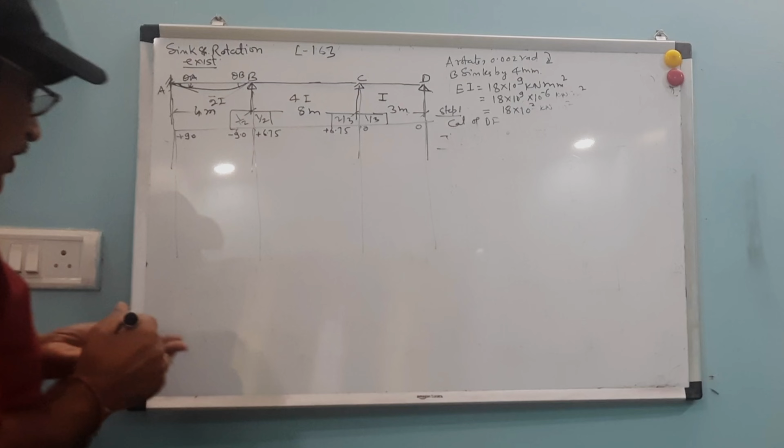This is 1/2, 1/2, and this is your 2/3, 1/3, this is your 2/3 or 1/3, let us see, this is your 2/3 and 1/3, this is your 2/3 and this is 1/3.

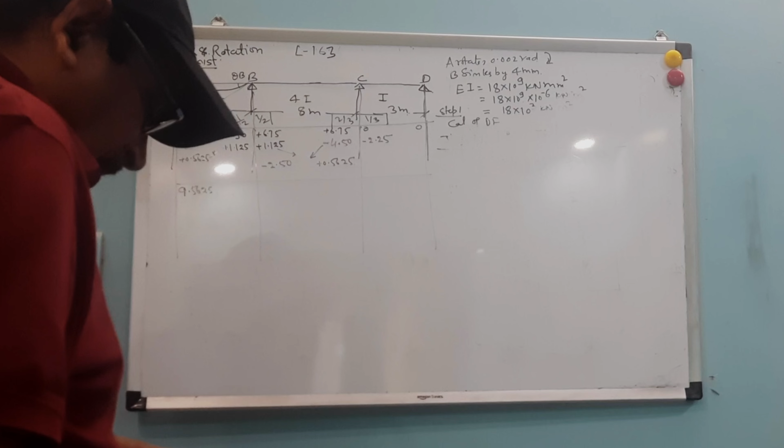7.875 comes here, and this will come, this will come 6.75 plus 1.125 minus 2.5, 5.375.

5.375 comes here, and how much finally comes here, this is your 6.75 minus 4.5 plus 0.5625, this is 2.8125, this is your positive and this is minus 2.25 and this is your 0. These values have come.

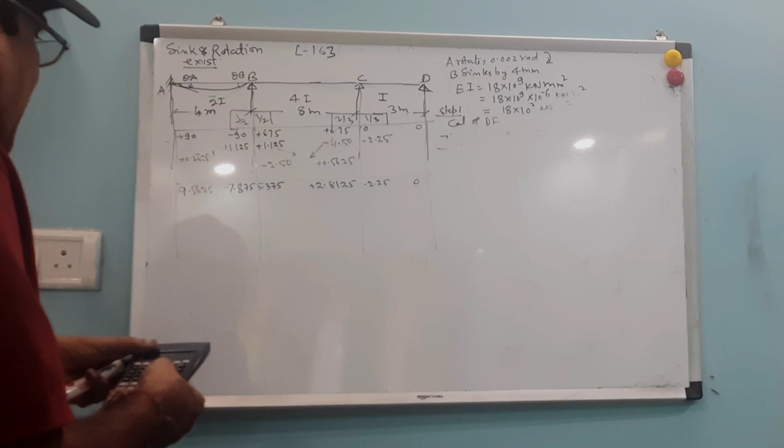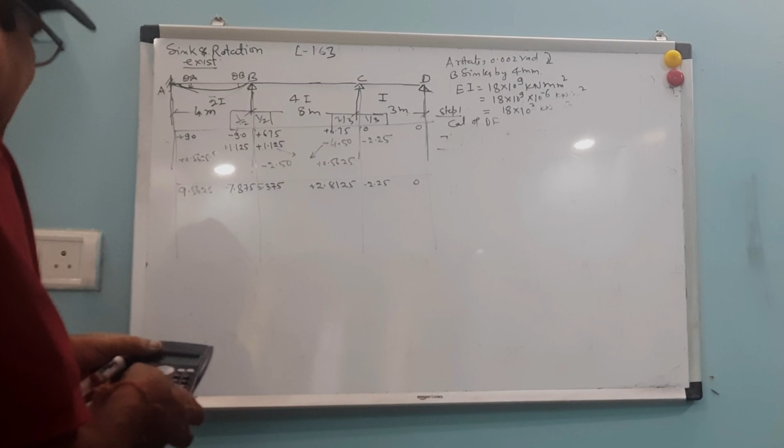7.875 plus 5.375, this is 7.875 minus 5.375, this is coming 2.5, 2.5 is coming in minus so we will make it plus.

1.25, so this will be plus 1.25, and how much will be this, let's see here, here your answer will come.

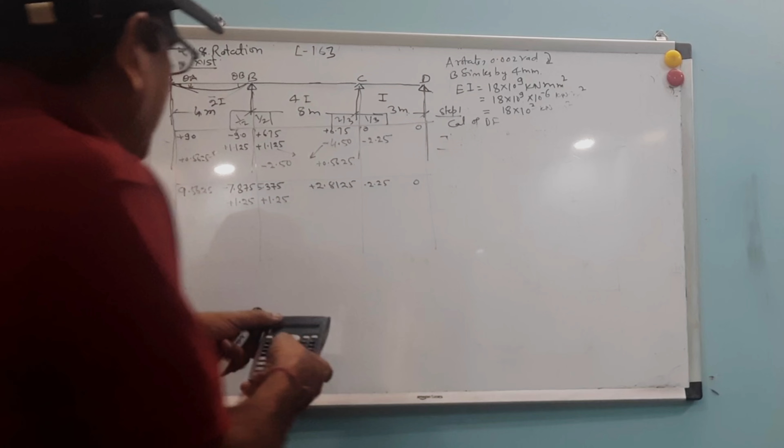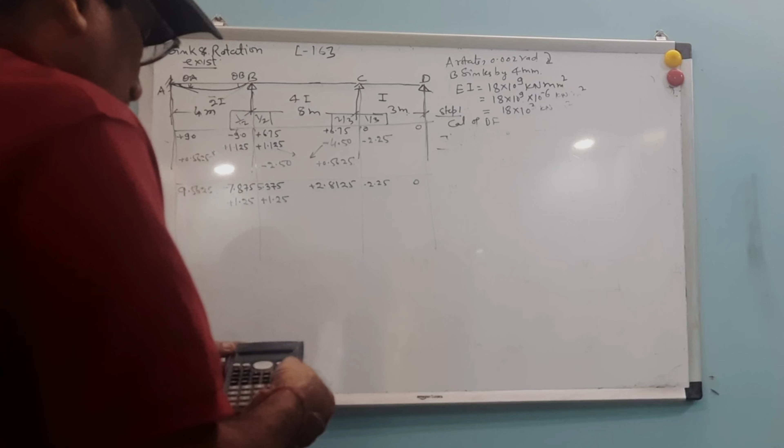2.8125 minus 2.25, this is coming 0.5625, since it is coming in plus it will become minus, divided by 3 multiply by 2, this is 0.375.

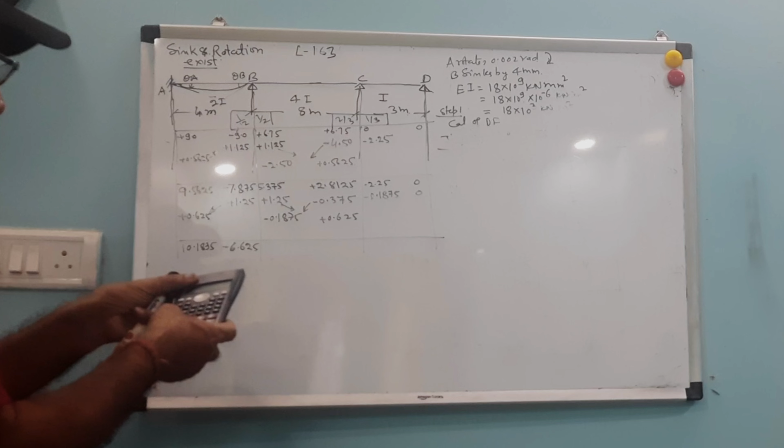How much this coming? Sorry, 2.8125 minus 0.375 plus 0.625, 3, this is coming.

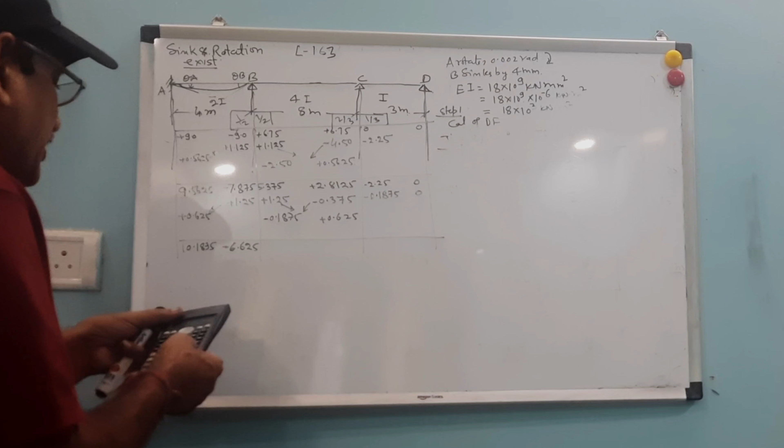How is it coming, 5.375 plus 1.25 minus 0.1875, this is coming 6.4, let's check this once again.

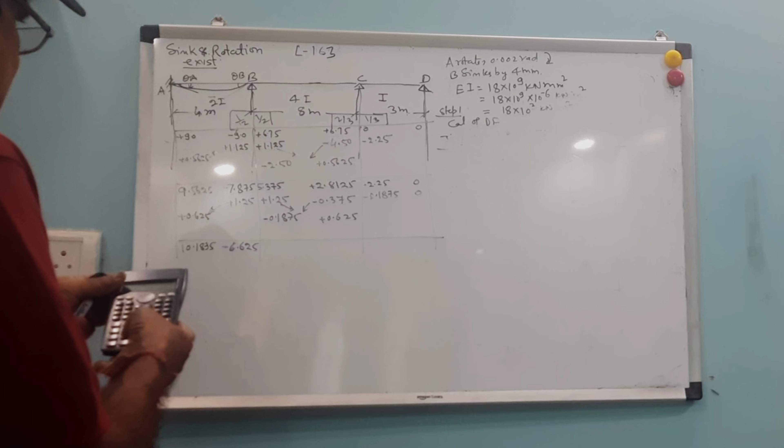5.375 plus 1.25 minus 0.1875, this is going 6.43, 6.4325, right now a difference is coming, and let's see how much comes here.

This is coming 2.8125 plus 0.625 minus 0.375, 3.0625, and how much this coming?

This coming, how much this, let's see, 2.25 plus 0.1875, this is 2.43, this is 2.4375 and 0. Then here there is an imbalance so we will try to balance it again.

So this has become 6.625 minus 6.4325, how much coming? 0.1925 divided by 2, this is coming 0.096.

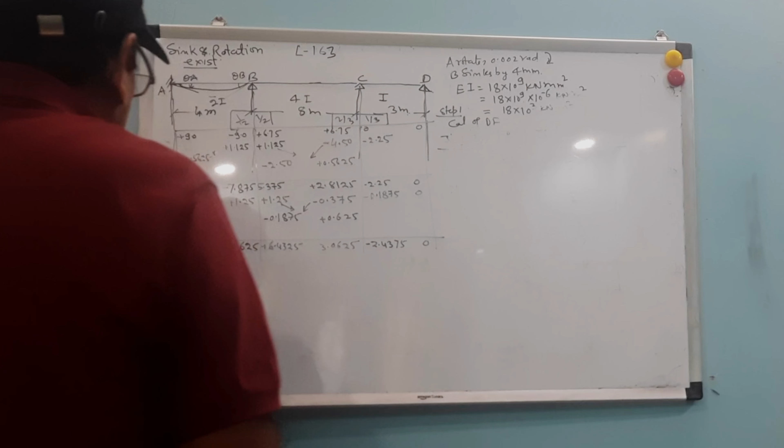0.096, this is coming plus 0.096, and this is coming plus 0.096, right? 0.096, this is in positive.

42 divided by 2, 0.21. Let us see how will this happen.

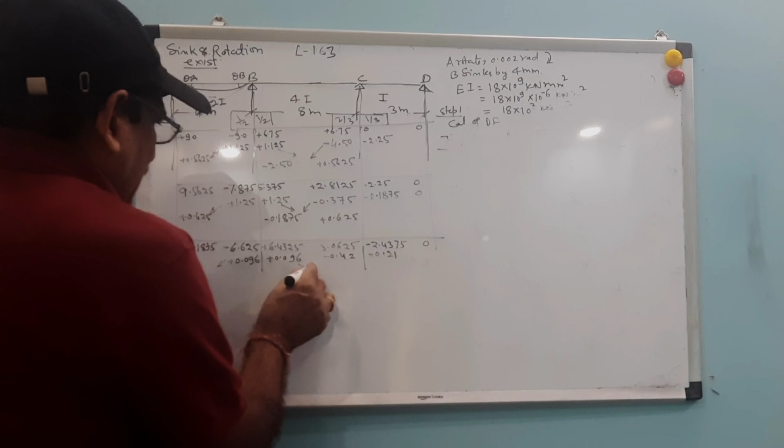So this will come, you transfer this, so we do this, 0.096 divided by 2, 0.048, this has come, 0.048, and how much is this coming? This will also become 0.048 here.

048, and now this is minus 0.21, okay, let's draw one line, here draw a line.

Let us find out this thing. How much this is coming? 0.048 plus 10.1875. This is 10.2355.

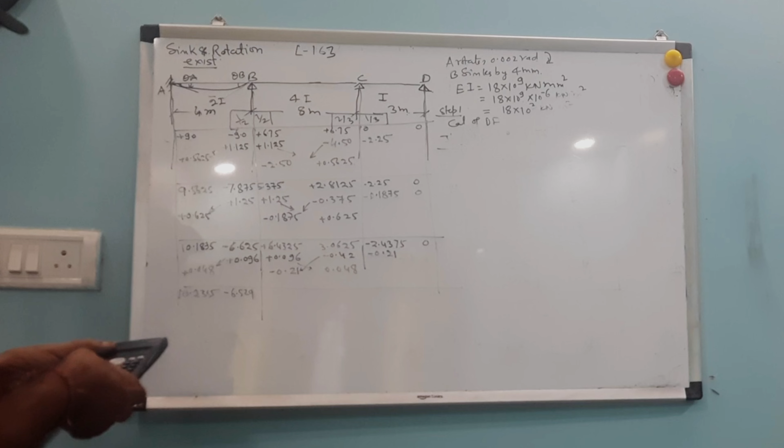10.2355. This is 10.2355. And how much is this coming? 6.625 minus 0.096, 6.529. And how much is this coming? This is 6.4325 plus 0.096 minus 0.21. This is coming 6.3185.

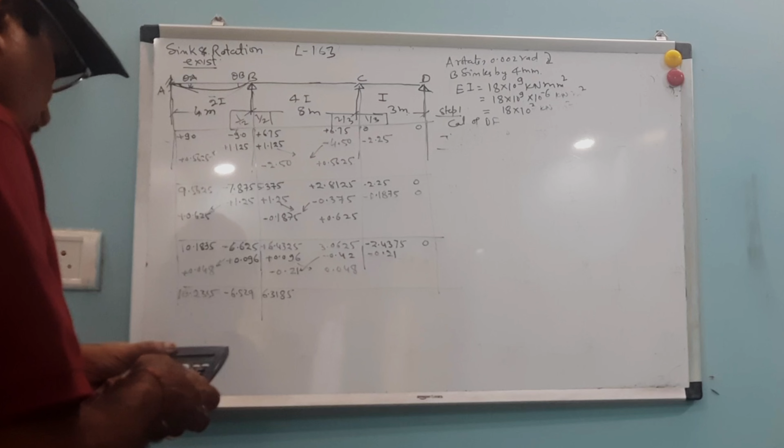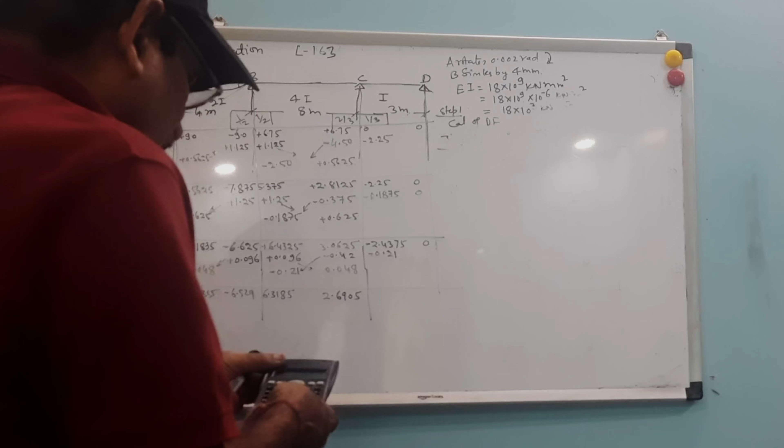6.3185. And how much is this coming? 3.0625 plus 0.048 minus 0.42. 2.6905. How much is this coming? 2.4375 plus 0.21. 2.6475.

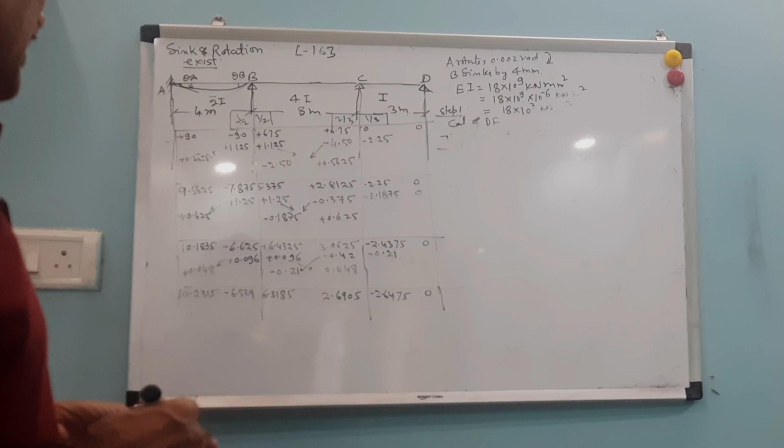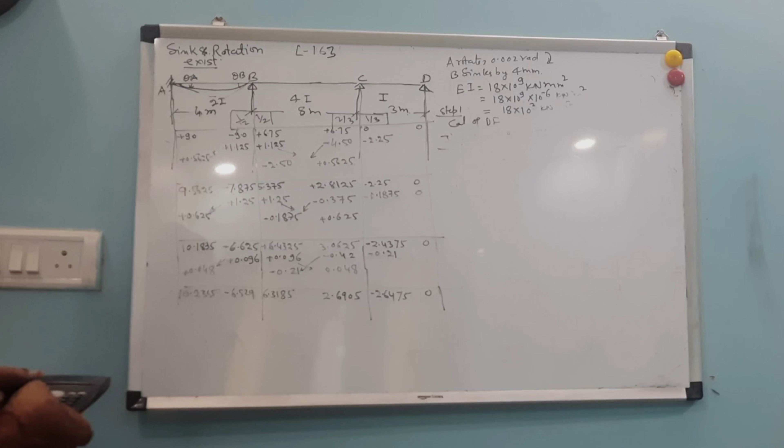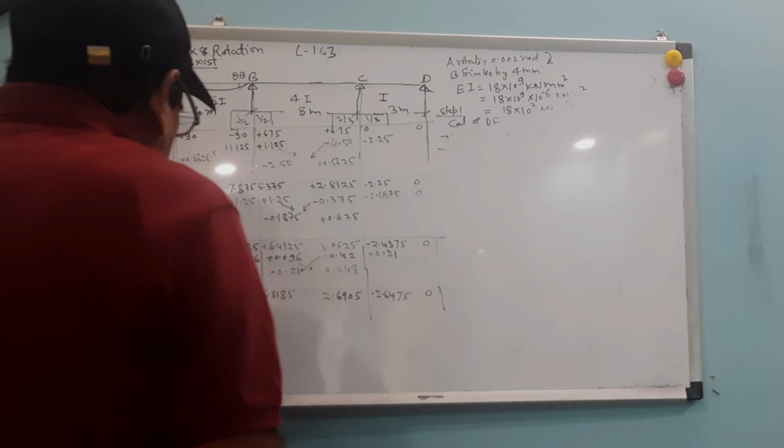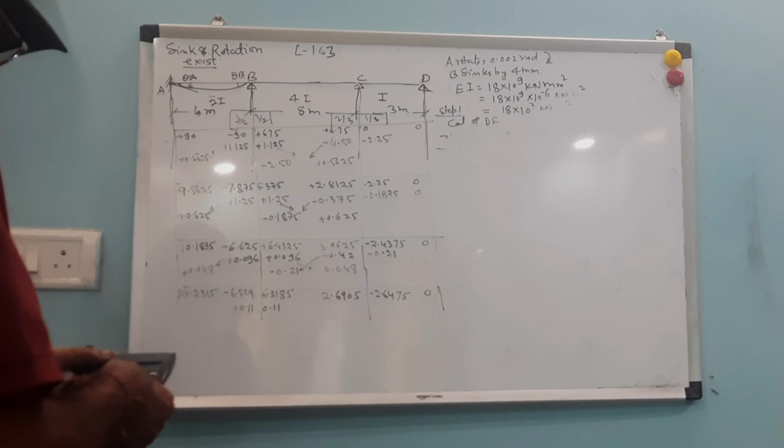This is 0.11. Let's see how much comes here. 2.6905 minus 2.6475, divided by 3, divided by 2. 0.03. This is coming minus 0.03, and this is coming 0.03 divided by... 0.01. This is coming 0.01.

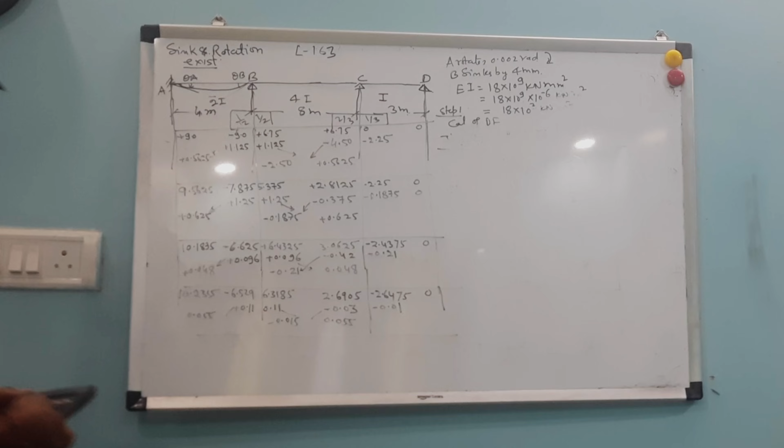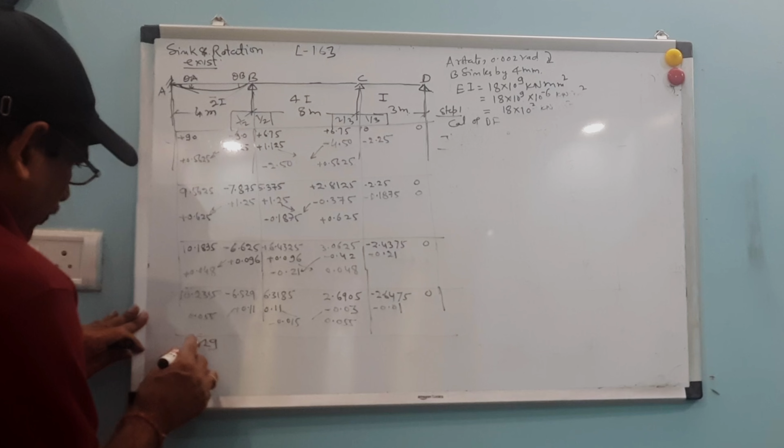0.11, 0.055. This is also 0.055. This is your minus 0.015. These are your values. Now let us do the final check. How much is this coming? 10.2355 plus 0.055. This is 10.29. And how much is this?

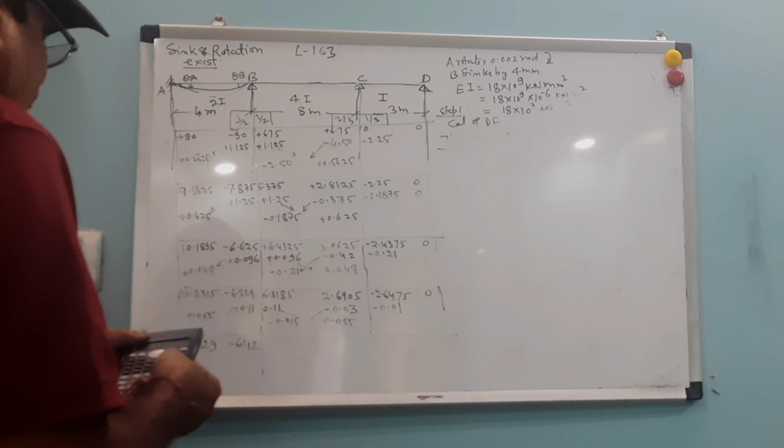6.529 minus 0.11. This is coming 6.42. How much is this coming? 6.3185 plus 0.11 minus 0.015. This is coming 6.4135. 35 is quite nearby, so we'll take it.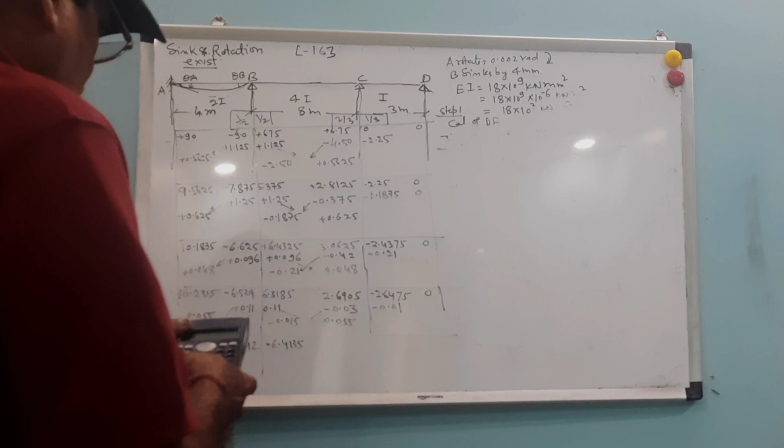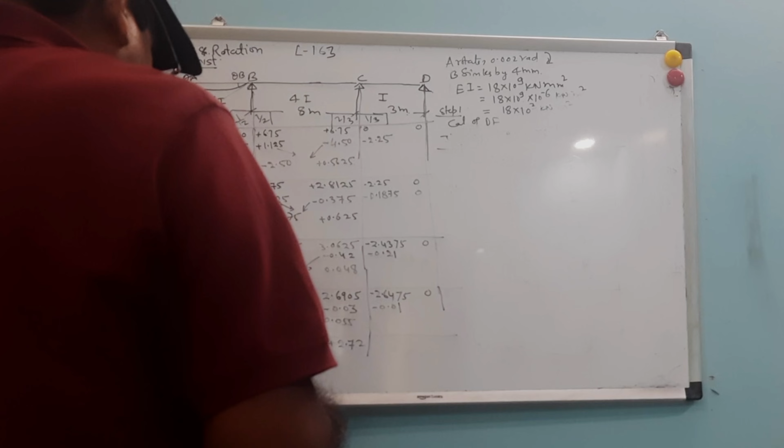2.6905 minus 0.03 plus 0.055. This gives me 2.72. And how much is this coming? 2.6475 plus 0.01. This is coming 2.66, and this is 0. So this value is coming.

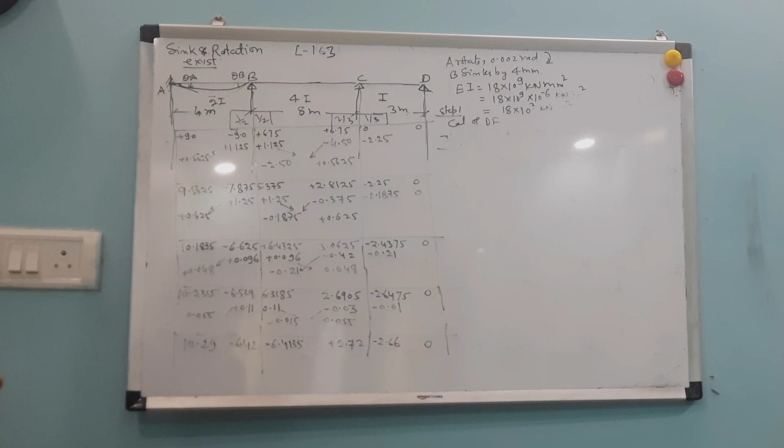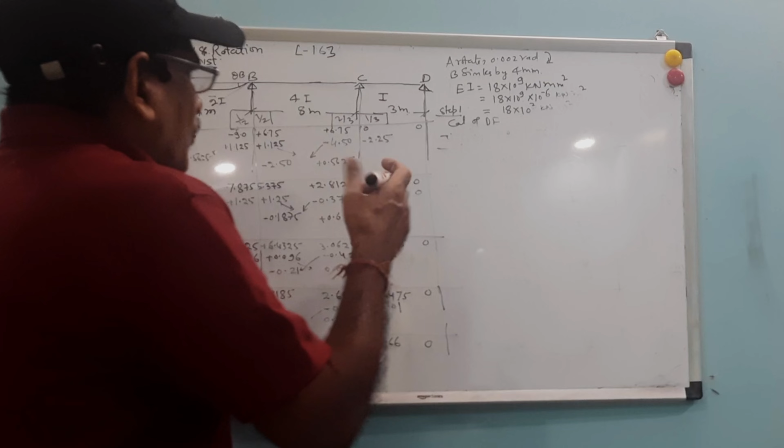So once more we try to go for the moment distribution, because this is approximately 6.41, 2.72, 2.66. This will be 6.42. No, this will be plus. This is minus. So we can have once more 6.41 and 6.42, 2.72. 2.6905 minus 0.03, 2.66 plus 0.0.

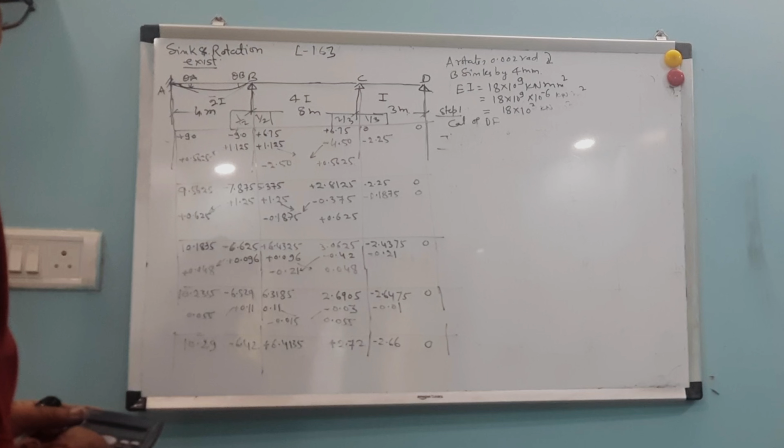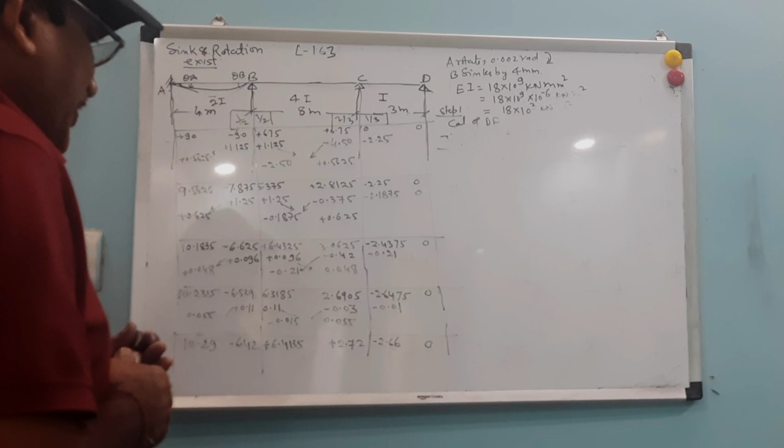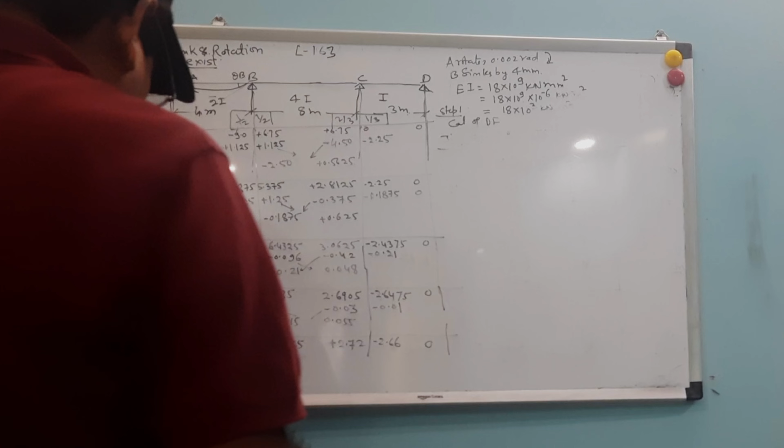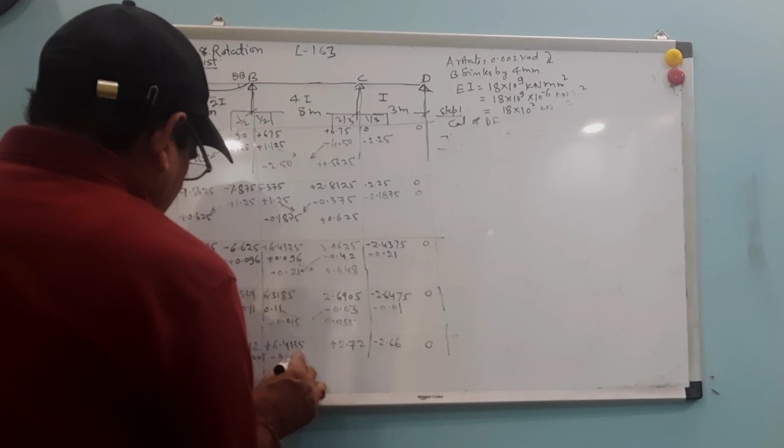Let us try once again. This is 6.42 minus 6.41. This is 0.01 divided by 2, 0.005. This is plus 0.005, minus 0.005. What about this? 2.72 minus 2.66, divided by 3, divided by 2. This is minus 0.04.

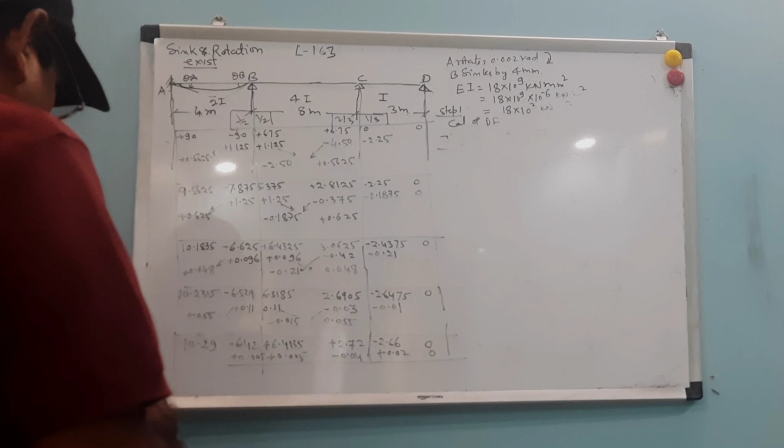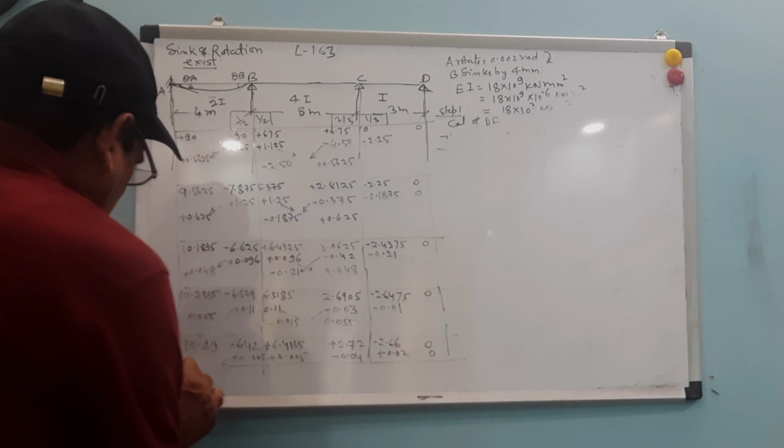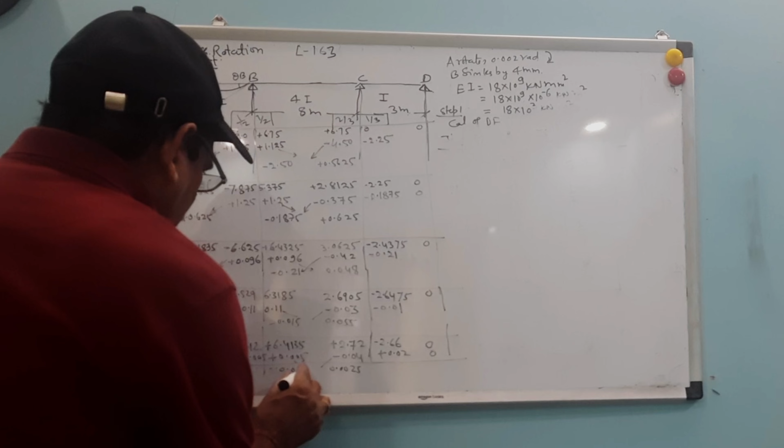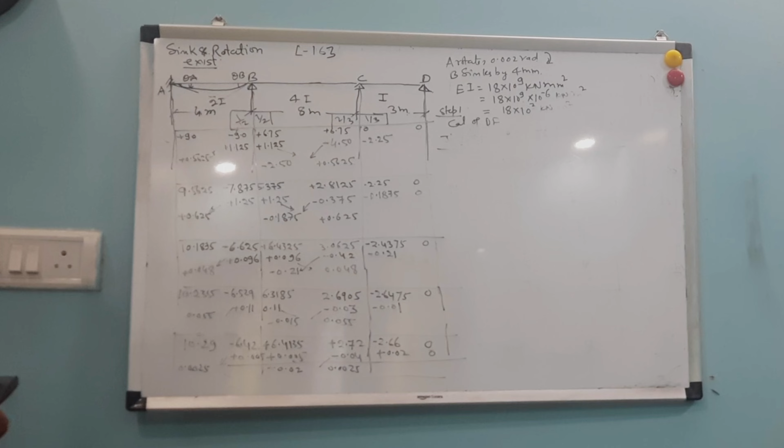So this is almost final. Let us evaluate this. This is 6.42. This is 0.0025. This is minus 0.02, and this is your final. Let us find this value. 10.29 plus 0.0025. This is 10.2925. And what about 6.42?

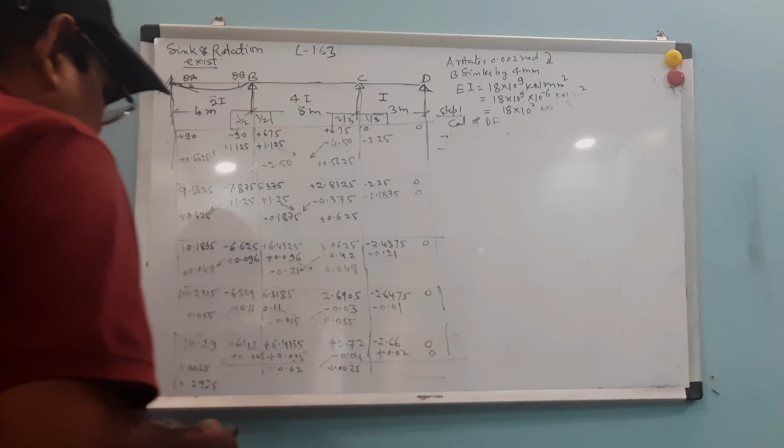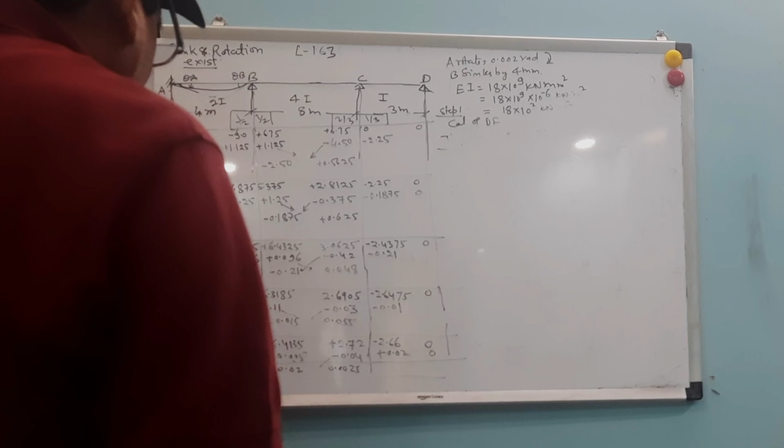6.4125. And how much is this coming? 6.4135 plus 0.005 minus 0.02. This is coming 6.39. So this is 6.4.

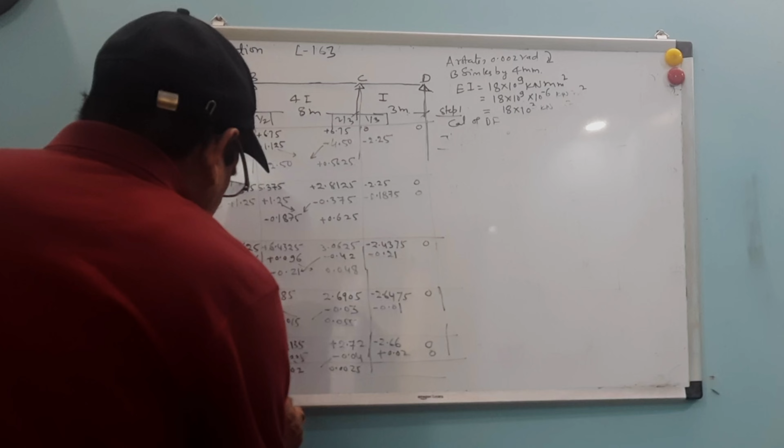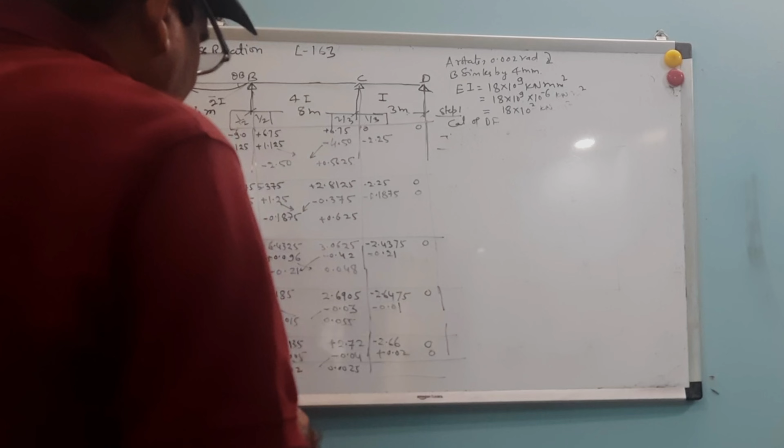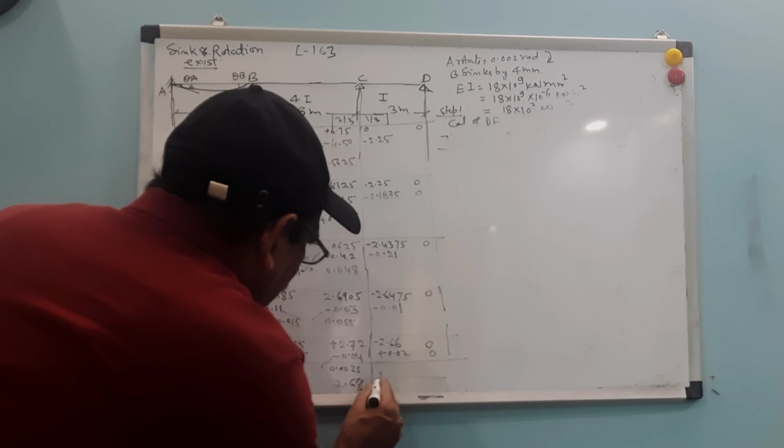How much is this coming? This is 2.72 minus 0.04 plus 0.0025. This is coming 2.68. And this is also 2.68. This is 0. So the final moments are like this. We can draw the bending moment diagram.

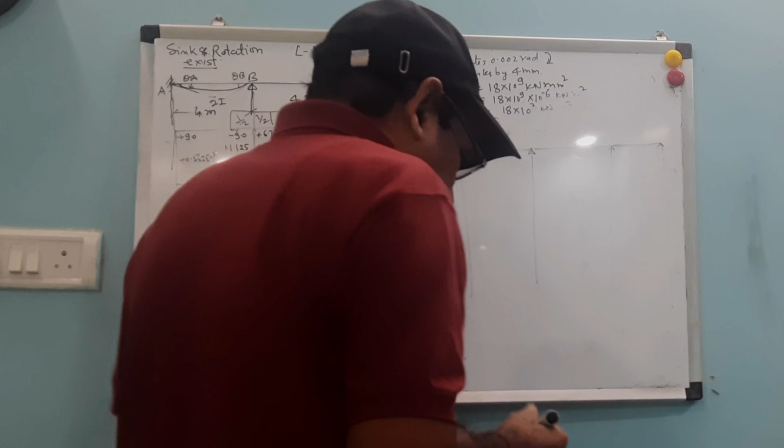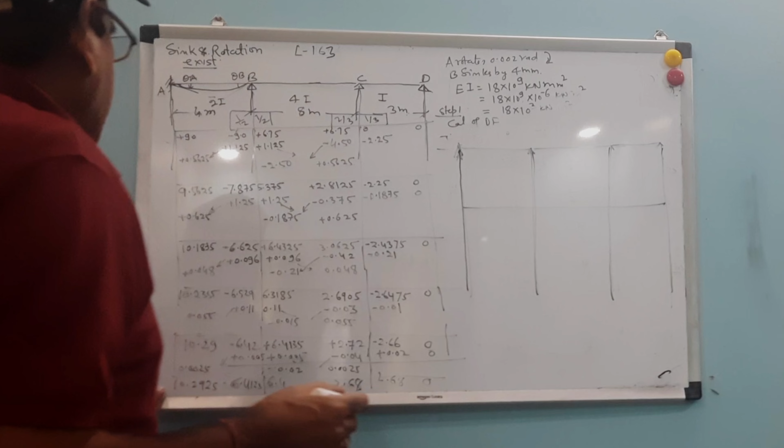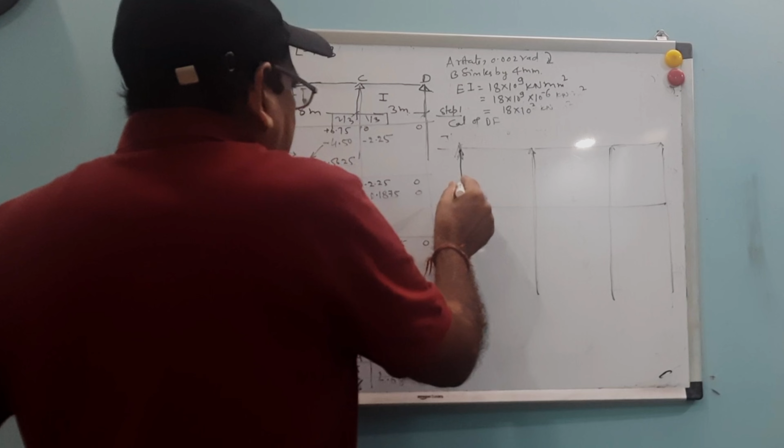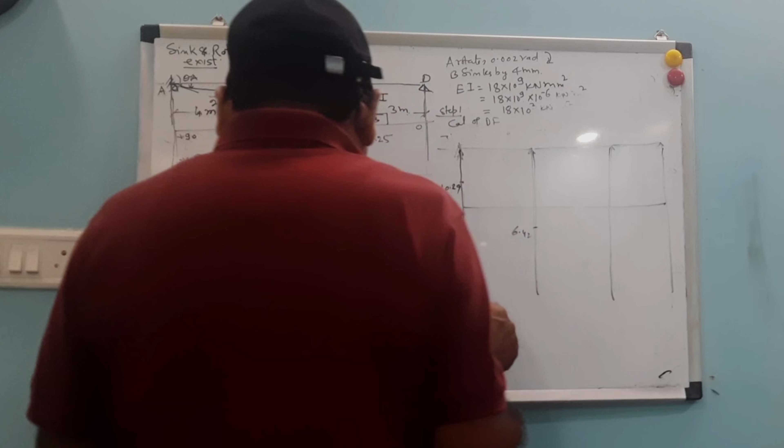This is fixed. This is your free end. We can draw the bending moment diagram with the help of this. This is plus 10.29; if it is clockwise, this is plus. This is negative, 6.42 negative. And 2.68 is clockwise, so this is also negative.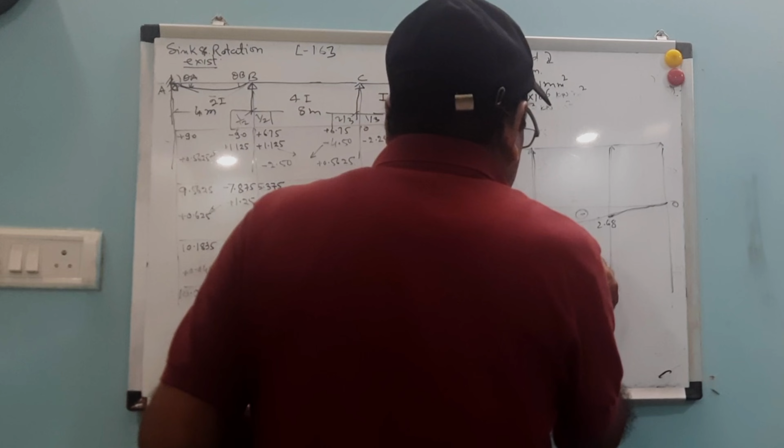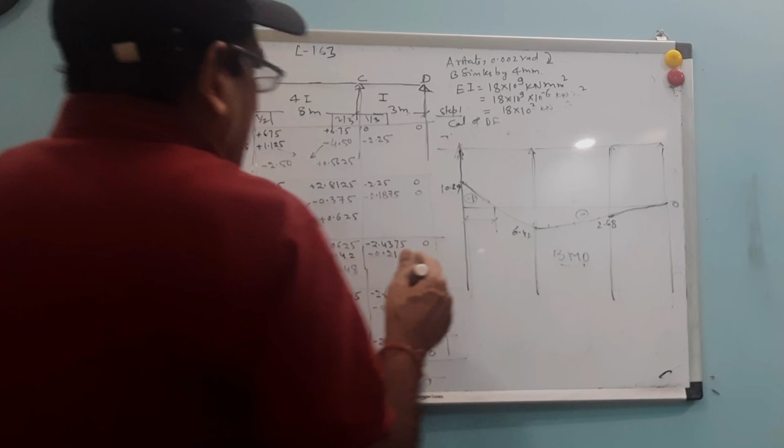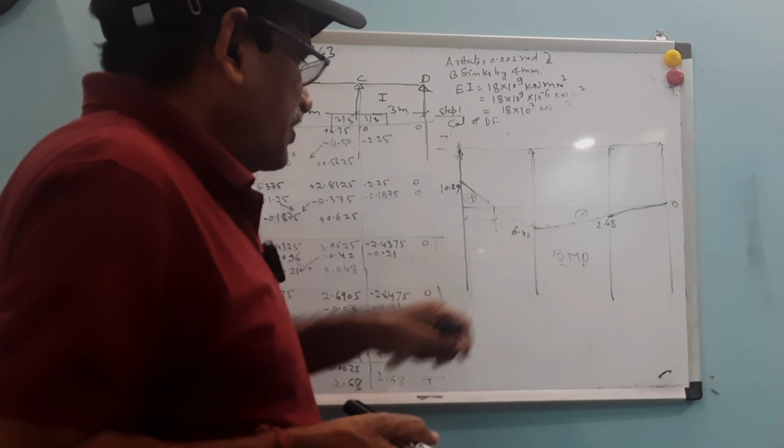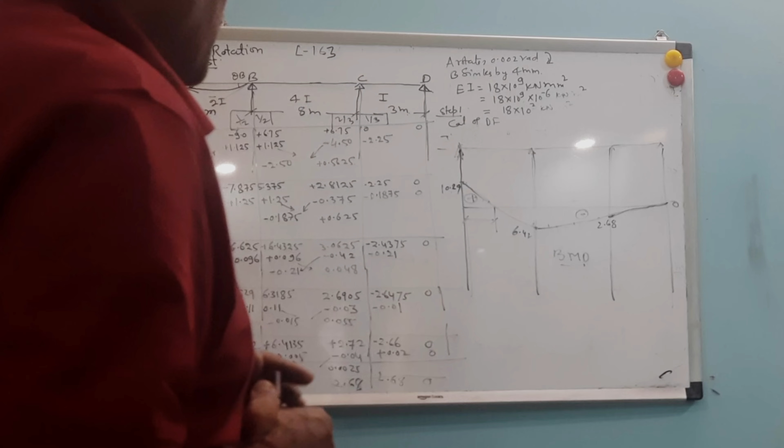This is 2.68, and this is 0. This is 2.68 negative, this is positive, and this distance you can find out. This is negative 6.42. So this is 10.29, 6.42, 2.68 and 0. This is your BMD. By taking moments we can locate this distance. So this is the BMD we have done.